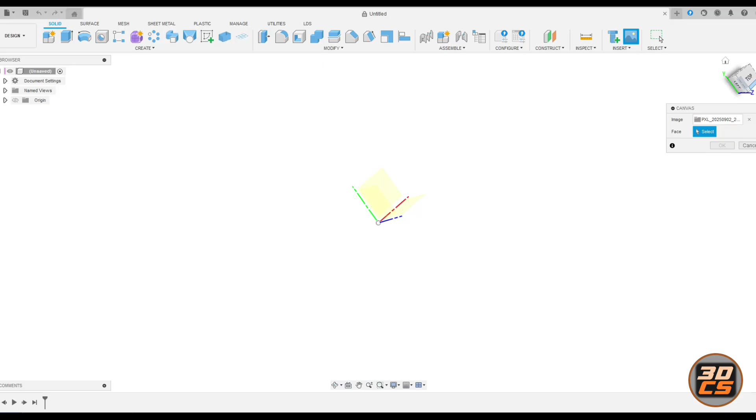Okay, first thing we're going to do, we open Fusion, and I come here on insert and insert canvas. So I search in my computer. This picture here is the picture of the handle I mentioned to you guys. So we look to the top, put it here on this plane, and then we take the caliper and I measure this bottom diameter. It's about 26 millimeters. So we come here, canvases, and then we calibrate.

We calibrate from here to here. It's about 26 millimeters. I work in millimeters. Many of you guys from the US work in inches. I believe some of you guys also can understand.

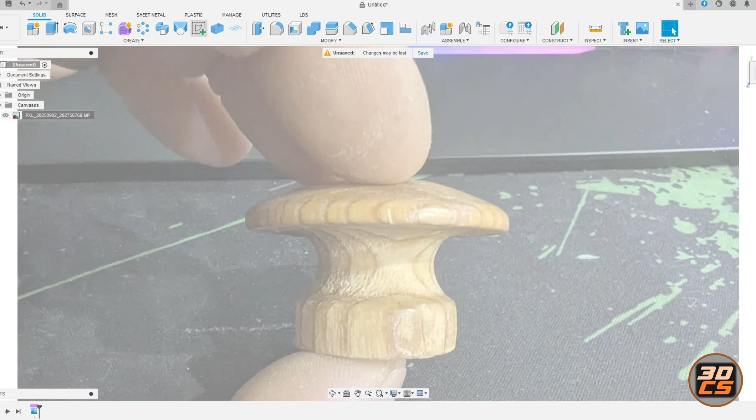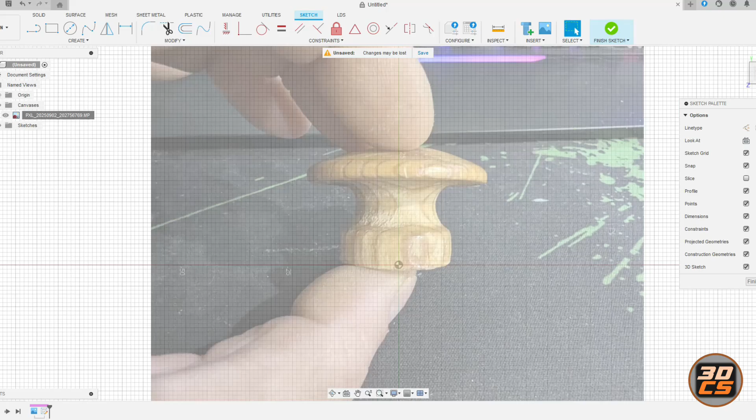Okay, and then we come here in this plane, and then we select this. What we can do now is to move. We can edit and move this to be more around the middle here. Yes, okay, like that is fine. And then we draw a center line here, and with the spline tool, we can just come here and create this here.

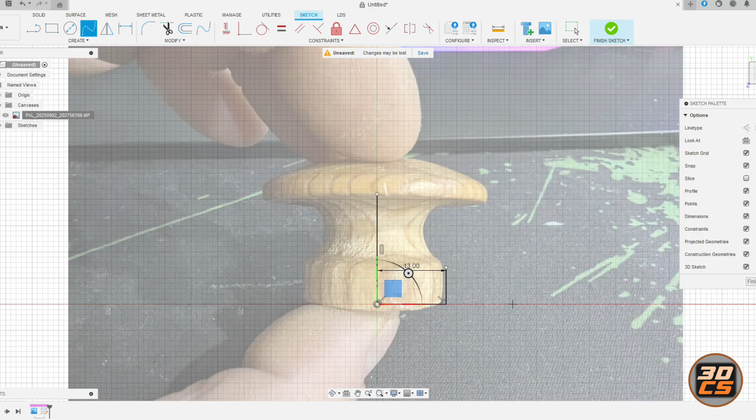26 is around 13, right? Mid, half, 13. What's happening? 13. Okay. And then we go up like this. Don't need to be precise. This is a wardrobe door handle. And then we come here. We can just design this like that. And here we can double click to close the line, the spline.

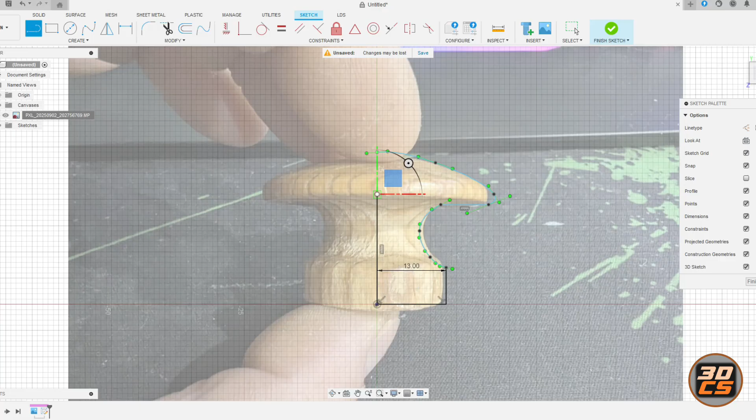And then we come here, go up, and spline again. We can make the spline here, and then we can click here, and that's all we need. So now we need just to close this to create this full profile shape. Okay.

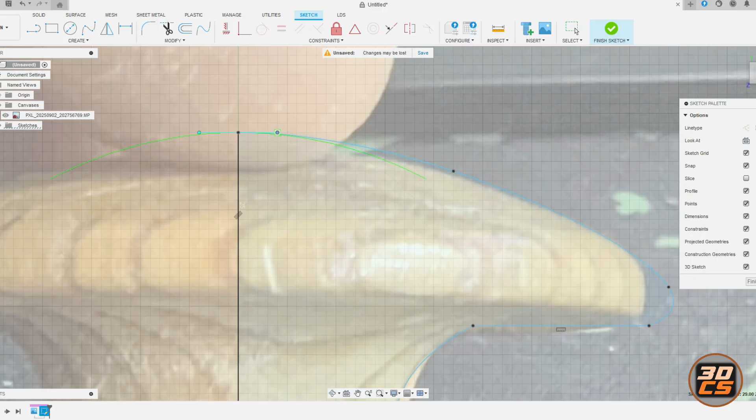What we can do now is just to hide the canvas and make any adjustments we may want. So we can just make this, because this is half of the profile, and we will circle this profile around the center line to create the profile we want.

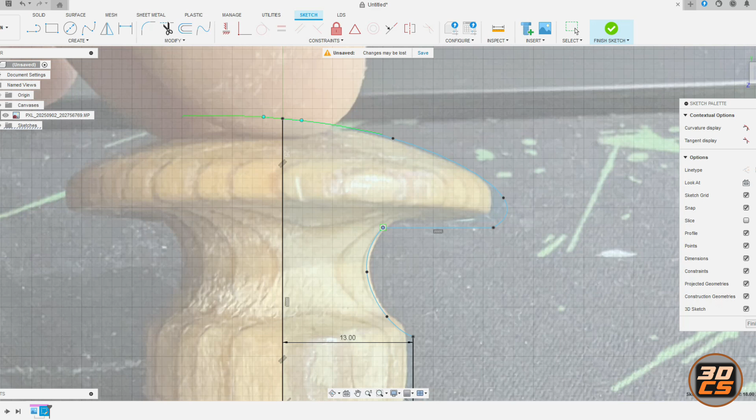And that's it. Now we come here and just select this profile, and select the axis, boom, and then we have the handle. It's very easy.

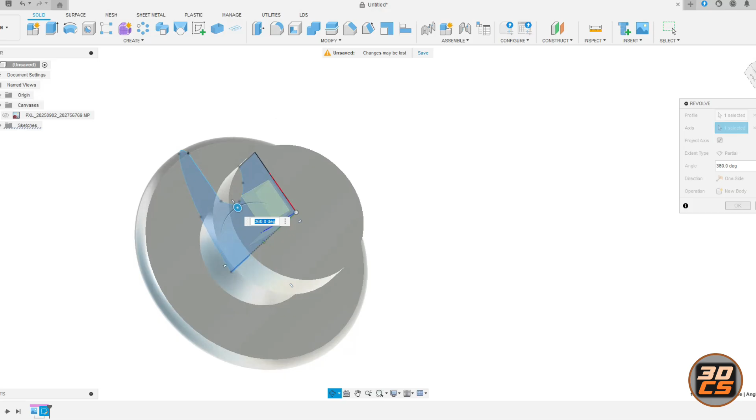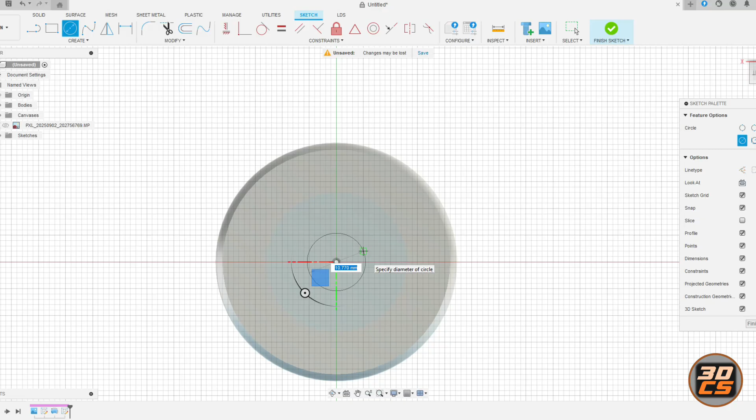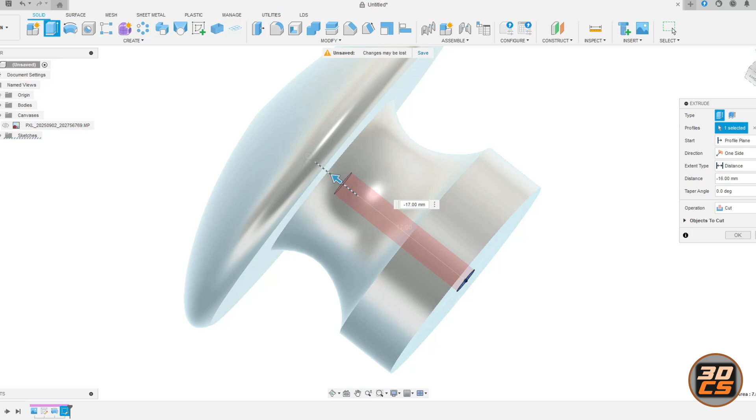Good. Now what we need to do is to draw the center hole. To draw the center hole, we select the bottom face here and include one circle, about 3 millimeters. 3 millimeters is more than enough, because the hole in the piece now is 3.5, so we just need to reduce it a little; 3 millimeters should be fine. And then we move this until there, 17 millimeters, minus 17, good.

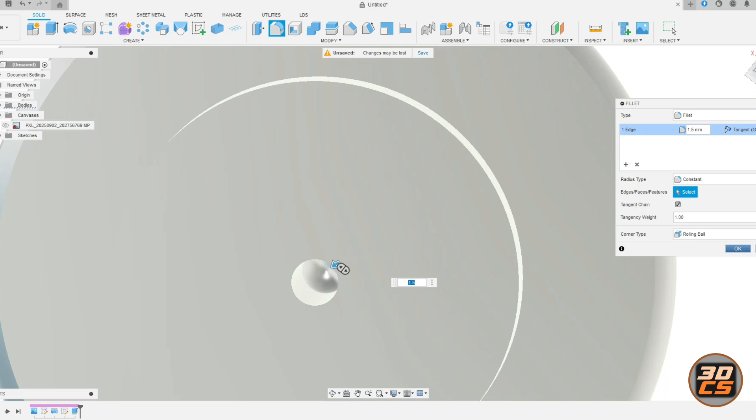To avoid the necessity to create supports, we can round all around there. So we have a 3 millimeter diameter. We put 1.5 to make it rounded. Let me show you what I'm talking about. Insert, we can come here, inspect, section analysis, and then we select this.

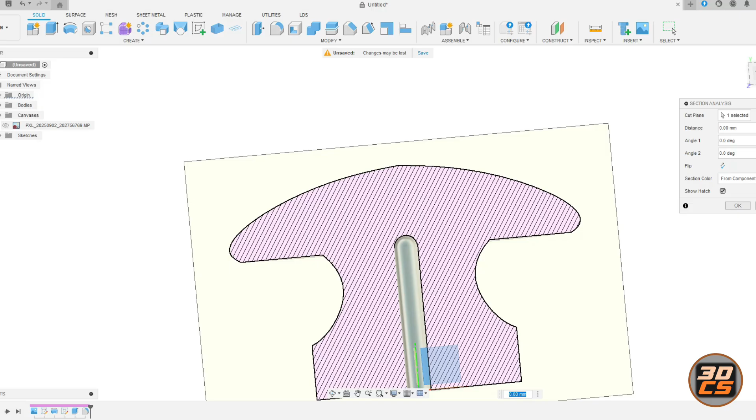This is what I'm talking about. In this way, we don't need to have supports internally here, because then it will be quite difficult to remove later on, and that's good. After that, we can remove the analysis, and then here we can also include some radius to be more like this. No, it's too big.

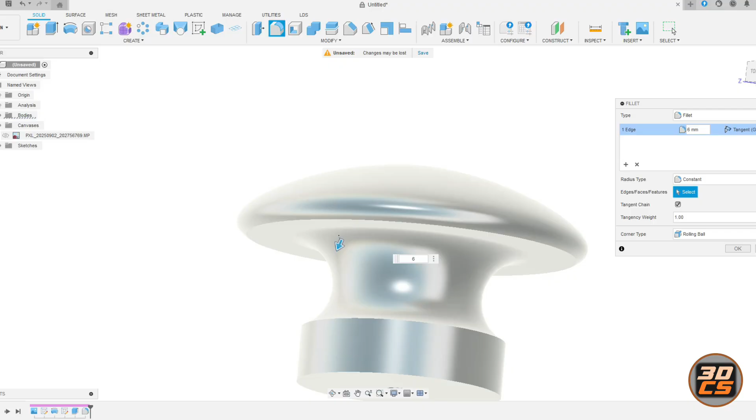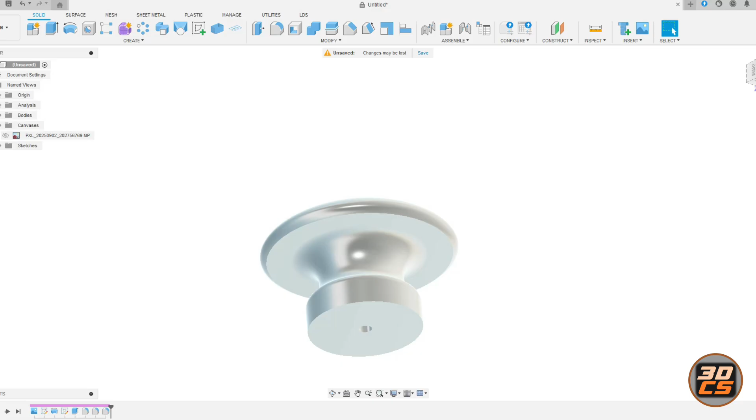Point like 4 or 5, 6, 6 is okay. And here as well. We can put here like 2, just to be a little rounded. At the end, all this area we need support anyway, but we will be good. And that's it. From here, we send to our slicer. So let's do this.

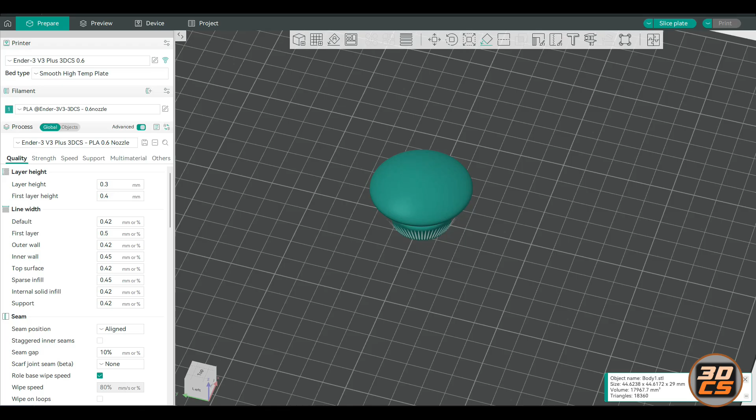That's it. Here, what we can do is just select this, and then we can right click on it. That's it. It's placed. Right click on it, clone. I have like, that's it. We can, yeah, it's fine. So I have a 0.6 nozzle in my machine now. Okay, PLA.

Yes, that's good. I just want to see 5%. It's too little. Let's put 10 and then select the cubic. I don't know. Cubic is good. I know many people used to select several profiles for each kind of infill or pattern, but I just change it every time, unless I'm using a different material or different nozzle.

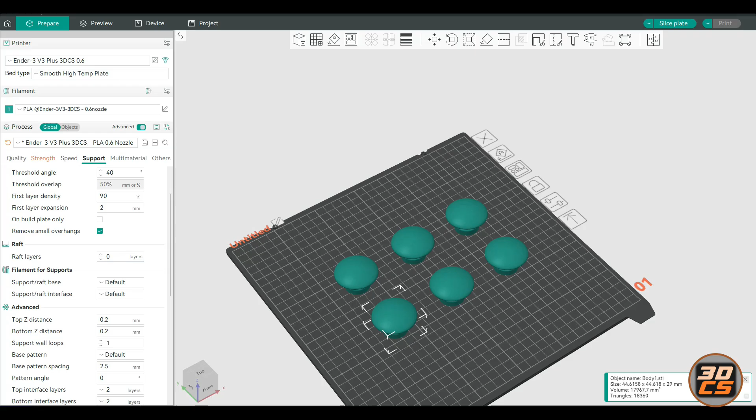Then, for example, here you can see I have 0.6 nozzle, and also I have the normal 0.4. That's 0.2 layer height, and then that's it. Support, yes, we need on build plate only. Doesn't matter because we don't have any other. We'll put here 40, is fine. Let's see how it does.

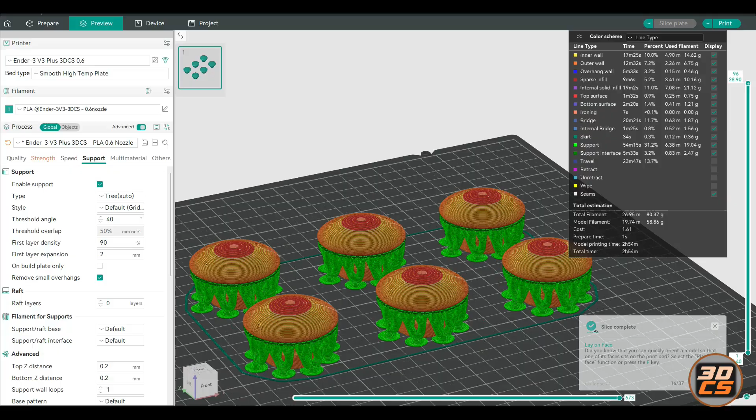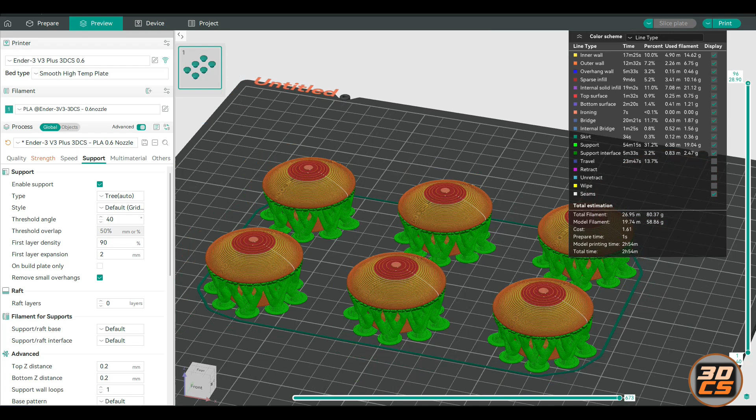Boom, and there we go. I will not modify it to be smoother on top. For me, it's fine this way. Should not be a problem. I like these tree supports, and let's see how it does. It will take 3 hours to do it.

So guys, this is the final result. As we saw, the part on top is quite rough. I'm using a 0.6 nozzle, so it also increases the steps once we got this rounded shape on top. There are three solutions for that. One is to change the design, so you can make some kind of rounded shape, but with the top flat. In this way, it will be like that and no supports at all.

I believe this is the best solution in this case, but it will not follow the same profile, the same design as the other handles for the same wardrobe, so it will be a little different. So that's why I keep it this way. The second option will be to sand it. It's not a big surface, so that's what I did, as you can see here in the video.

And the third option will be to change the layer height in the slicer. So in this portion of the part here, you change the layer height. Now I believe it's 0.3 in my case, because I'm using a 0.6 nozzle. So you can use like 0.2 or 0.1 layer height, and the differences between the layers, reducing along the radius, will be less, and then will be not so visible. But at the end, it works, and this is one fix for this tiny problem.